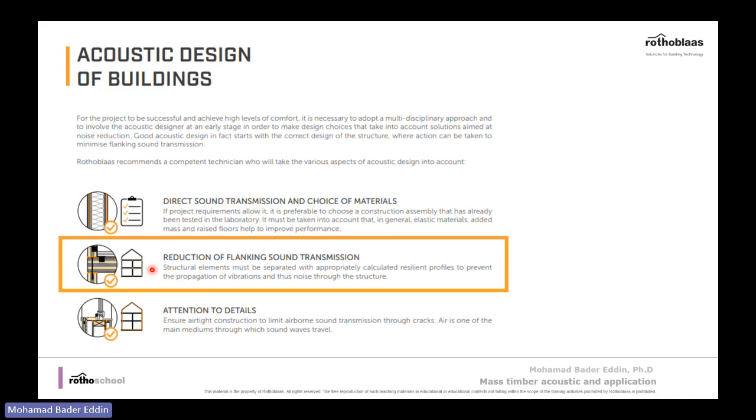So at the beginning, we will start with flanking sound transmission. Here we can see one of our interesting products, the Xylofon elastic interlayer. We have used it in different projects, as we can see here in CLT projects, mainly wood structures or frame structures, in the US, in France, in Vancouver, Canada, and elsewhere.

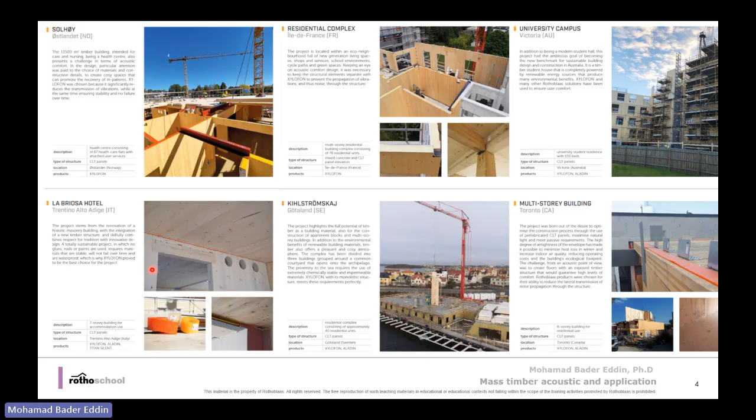So we will start with a bit of an intro about what's the definition of flanking transmission, and we will introduce our solutions and how to calculate your product.

I'll start with a question: are laboratory results and on-site results identical? The simple answer is no, because in the laboratory, as you can see here, we have controlled conditions. We always measure the direct sound transmission of the separation, whether it's a wall or floor. In our case, when we represent Dd, that's called direct, so we measure the actual sound insulation performance of the separation.

However, when we go on site, it's not as perfectly controlled as in the laboratory. We can see that, including the direct path, there are different paths, what's called indirect or flanking sound transmission. In simple walls, sound can transmit from wall to wall, FF, when we say FF, like flanking, and from the floor or the separating element to the other wall, that's called direct flanking, and of course with floor to wall as well.

We can see this on different sides. For example, if you have a typical wall between two rooms, on each side there are three flanking sounds, and if we have four sides, the number of indirect paths totals 12 transmission paths.

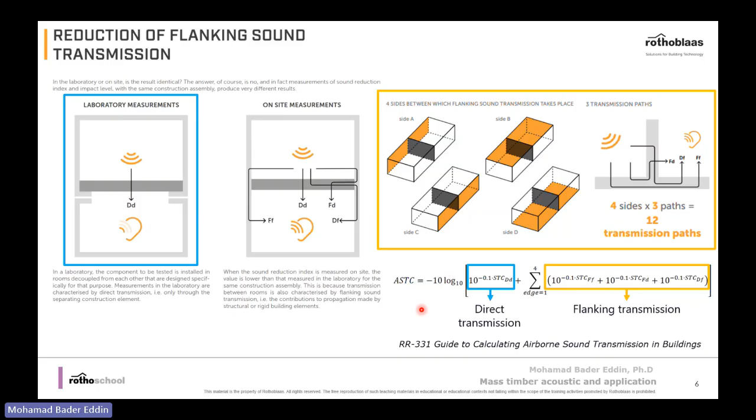If those paths are not properly designed, they can cause a decrease in the sound insulation of our assemblies. Usually we represent the sound insulation performance on site as ASTC, apparent sound transmission class. It's the combination of the direct transmission of the actual assembly or separation, plus the flanking sound for each edge. So each edge, as we said, has about three paths. All of that should be included in order to identify the right sound insulation performance on site.

The sound insulation performance for flanking on edges is highly dependent on what's called KIJ, or vibration reduction index. When this number is high, that means better performance. So the junction at the edge can absorb energy, and we get better sound insulation performance.

Usually this is the case if we didn't put any interlayer, and this is the case when we have an interlayer. We decrease the flanking paths, and only the direct path will be controlled in our case.

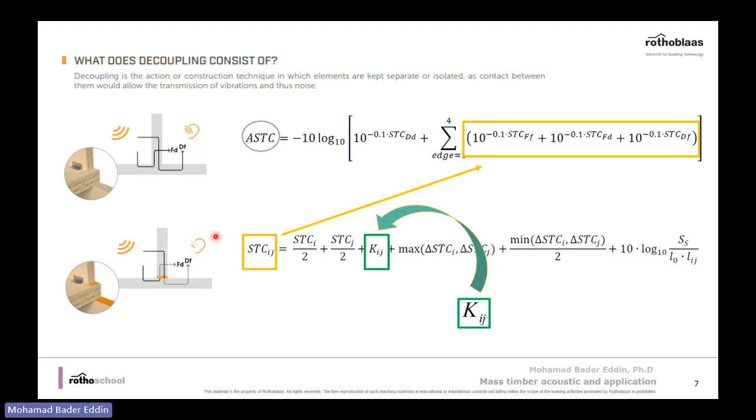Just a small theory about how we calculate KIJ, the flanking vibration reduction index. Usually it's the difference of the mean velocity level differences between two elements. For example, floor and wall: we excite the floor and measure the vibration velocity level differences simultaneously between those elements. It also depends on the equivalent absorption length of the elements.

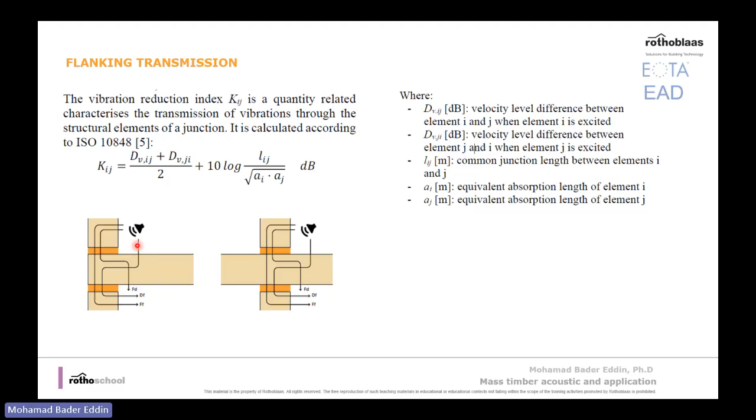So this is how we measure it. It's really important that this is measured and taken into account in order to know the actual performance of your design.

Here we can see that when we have a floor or a separation, it's really important not to control just one edge. It should be controlled by interlayer on all edges, so we can decrease the flanking sound, or indirect sound, which always has a positive impact on the sound insulation.

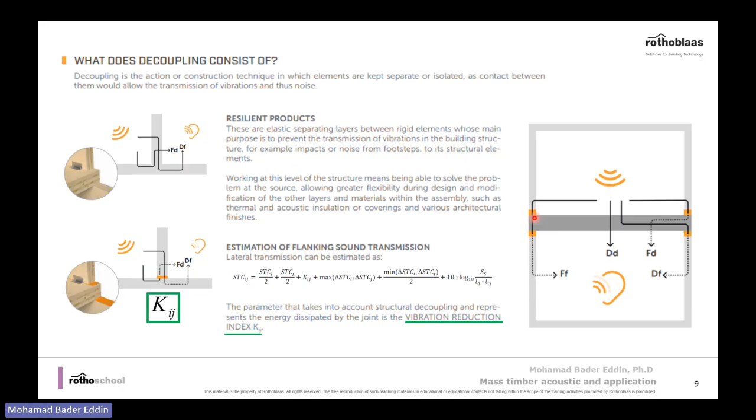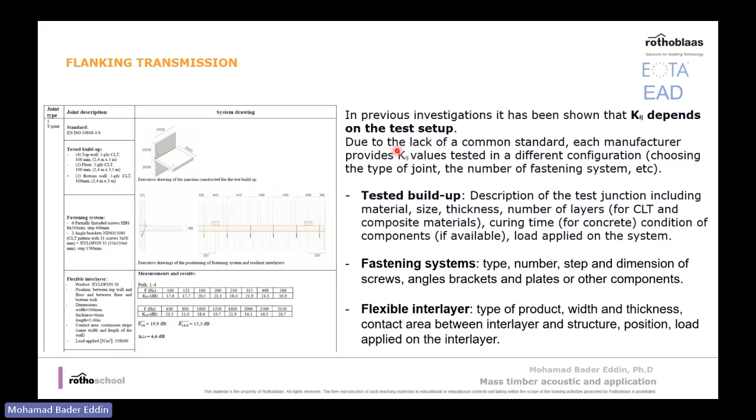As shown in previous investigations, the KIJ or vibration reduction index depends on the test setup. In the market, there is generally a lack of a common standard. There's an indication of how to measure it, but no common standard to identify the performance of elastic interlayers. Each manufacturer provides KIJ values without explaining in detail the test build-up, fastening systems, type of elements, thicknesses, etc. This has a high impact on site.

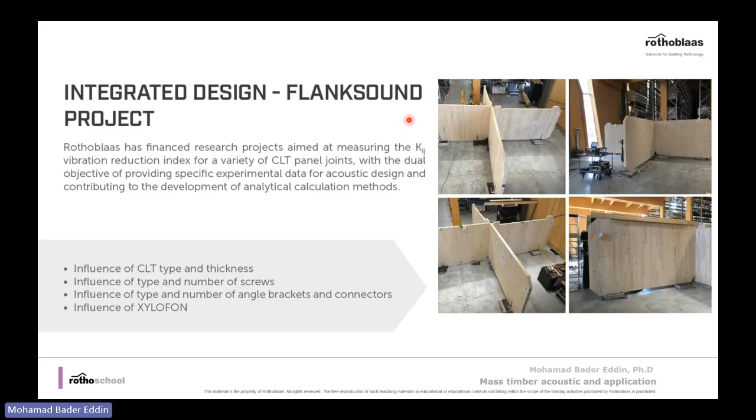For that, Rothoblaas financed a research project aimed at measuring the KIJ, or vibration reduction index, for different CLT panel joints. We identified different CLT thicknesses, and provided details on the number of screws, their diameters, and spacing between them. We also identified the number of brackets, angle brackets, and connectors used to connect those junctions, and the influence of the elastic interlayer. We have different products, and we'll go through how to choose the right one depending on your case.

The objective of the project is addressing that flexible interlayers are not currently covered by a harmonized standard. There's no European, Canadian, or US document that specifies how to provide information for flexible interlayers. The motivation of the project is to analyze and characterize the resilient profiles, in order to have data sheets that provide accurate and transparent results.

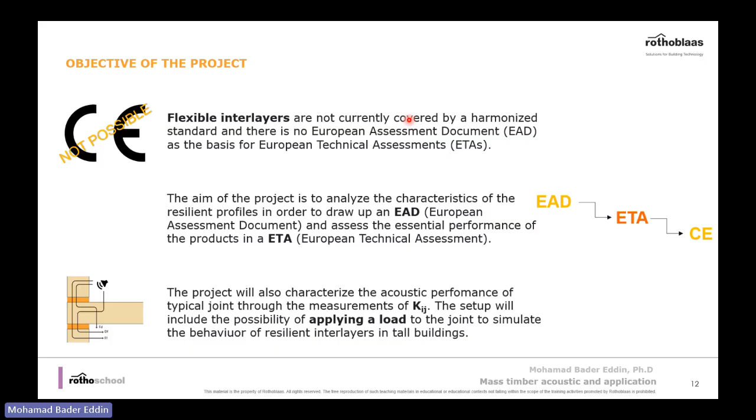In addition, which is really important, in our measurements we applied a load on those resilient profiles in order to simulate the real state, because on site there is dead load, live load, and occupants. This also has an effect on the performance of these resilient channels, which may not match the results written in the data sheet.

Here's one of the examples: we have an X junction. Usually to represent the vibration reduction index, we refer to a number for each side — floor 1, 2, 3, 4. So when we say KIJ 1,2, this is the vibration reduction index in the junction or direction of 1 to 2, floor to wall.

In both junctions of this X junction, we used HBS screws with a 400 millimeter step, with no resilient profile, and a construction sealing. We put it here at the intersection, or on the junction, and we can see up to a 3 or 4 decibel improvement in the sound and vibration reduction index.

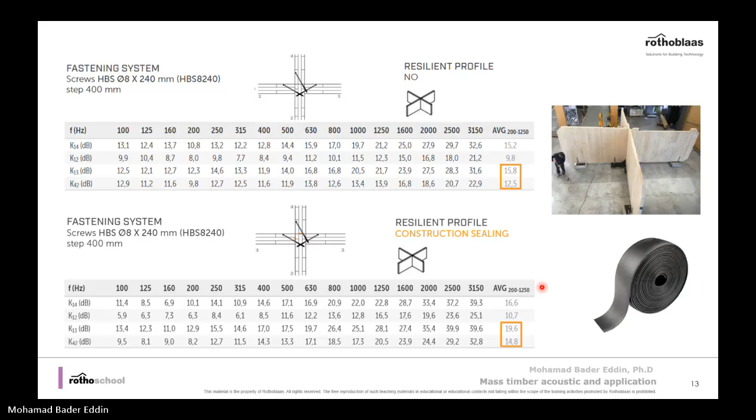Another measurement was done about an L junction. You can see the wall, for example. So there is no resilient channel or resilient profile used, and the only thing used is we increased the step between screws here. We can see that just by increasing those steps, we have almost 2 or 3 decibels better on the vibration reduction index.

This is usually when we increase the steps, it can be reflected another way, that we have a less rigid junction, and the vibration can be dissipated, or the energy could be dissipated through the junction. So we could have improvement, while when we have more rigid, or like more screws, that could also affect it.

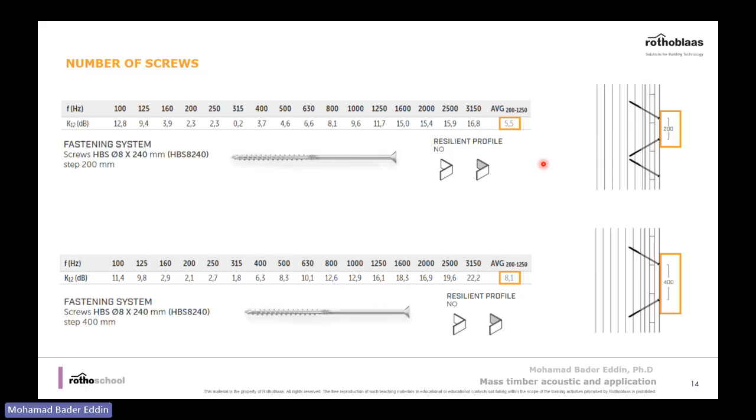So all of that wasn't just some solutions with interlayer. We also included the effect of the screws, the connections with elastic interlayers, and the distance between screws. Another interesting result here: we used the HBS, which is a partially threaded screw, and the VGZ, which is a fully threaded screw. We can see here that we have almost 4 decibel improvement without any resilience, nothing.

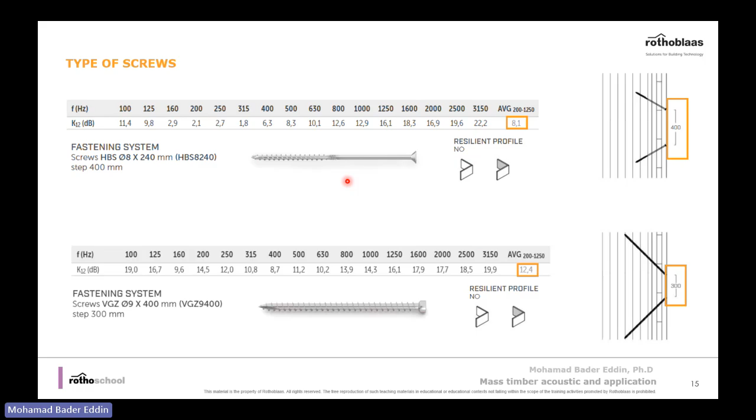We can make a comment here, because when we have partially threaded screws, their job is just to tie up the elements together, while with fully threaded screws, we have connections without necessarily tightening them up as much as partially threaded screws. When you tie them up, they will be close together and tightened, and the vibration can be transferred easily, which of course decreases the sound insulation performance.

You can also refer to our manual for XYLOFON. We have an interesting one, providing many details. For example, here an L junction and a T junction, where we provide the thickness, length and width of each floor and wall, the fastening system, and the type and name of the XYLOFON as well. And we calculate the KIJ.

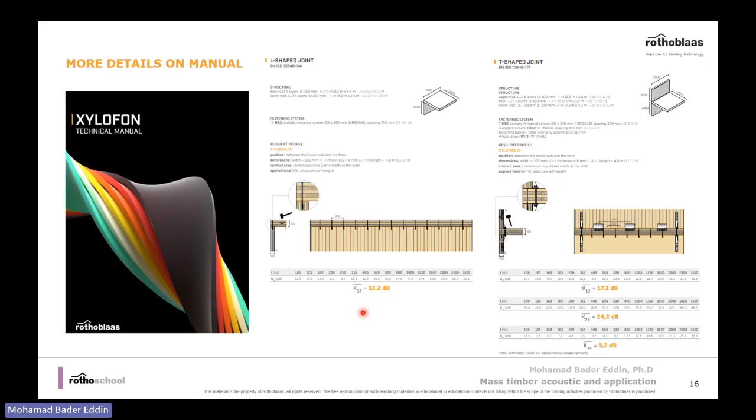Here we can see when we use XYLOFON 35 with fastening, there's an improvement. The KIJ is 13.2, and so on.

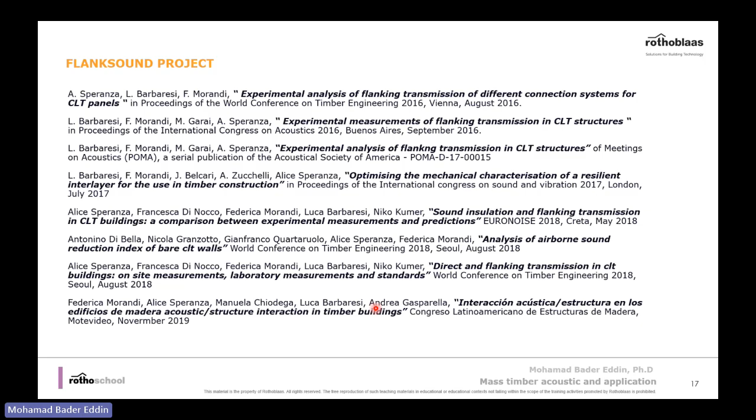For the projects, we also published different articles just to prove our results and to provide how we did all the measurements and the setup. So we can go either to our website or the published articles to find out more details.

Our product is called XYLOFON. We have different types and different lines, and each line depends on the load applied on that junction. For example, with XYLOFON we can reach an improvement of up to 7 decibels for KIJ, and it depends on each structure, each junction, and the details.

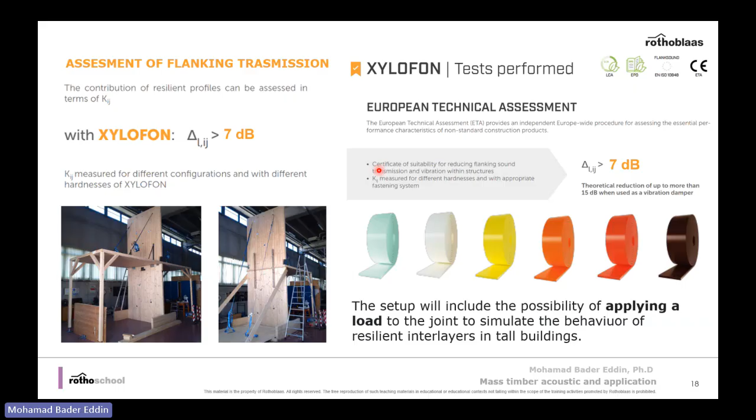Here we can see the mock-up setup. We have an X junction, identified with CLT. We have 2 angle brackets and 6 partially threaded screws, HBS, and we use XYLOFON 35.

We also applied the self weight of the structure, because this is really important, since in reality there will be self weight of the structure, and this is going to affect the results.

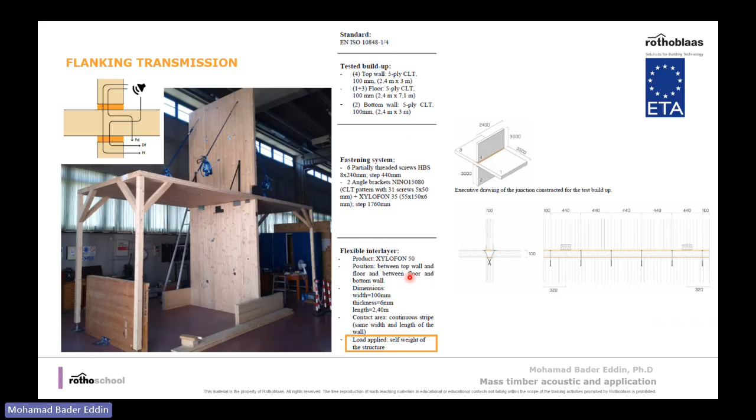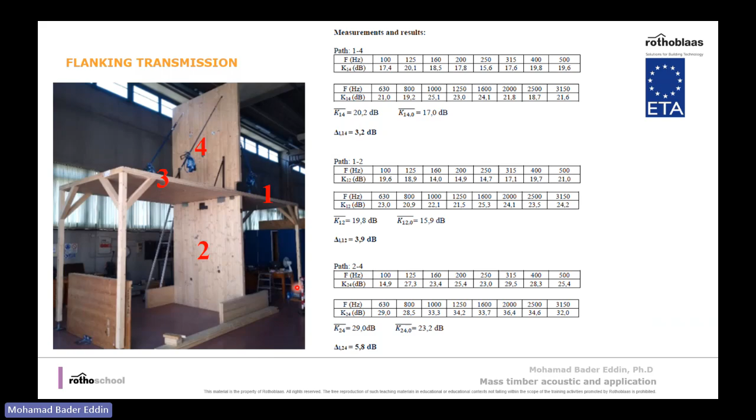Here we can see, as we said, we represent each floor and wall with numbers to identify them. With and without XYLOFON, there is an improvement of 3 decibels for junction 1.4, and as well for 1.2 and 2.4 horizontally, we can have an improvement of up to 6 decibels, 5.8, almost 6 decibels. After that there will be better results, and it depends really on the fastening type, the resilient profile, the loads applied, and all of that.

Here's another example for a T junction. We used XYLOFON between the floor and the wall, as we can see here in the junction details. The same thing: we use 6 partially threaded HBS screws, 2 angle brackets, and XYLOFON 35, and we applied a load as well.

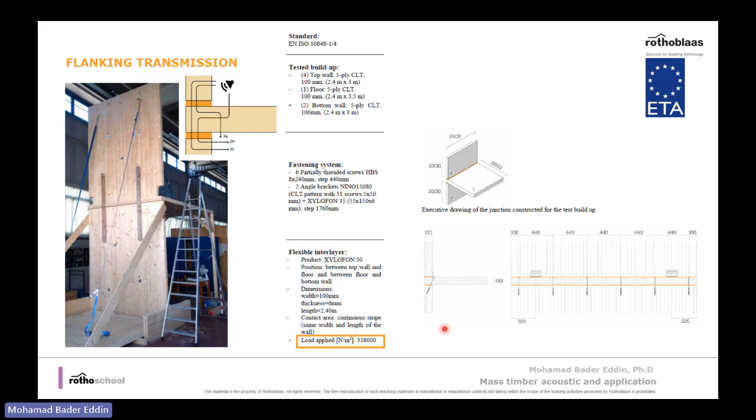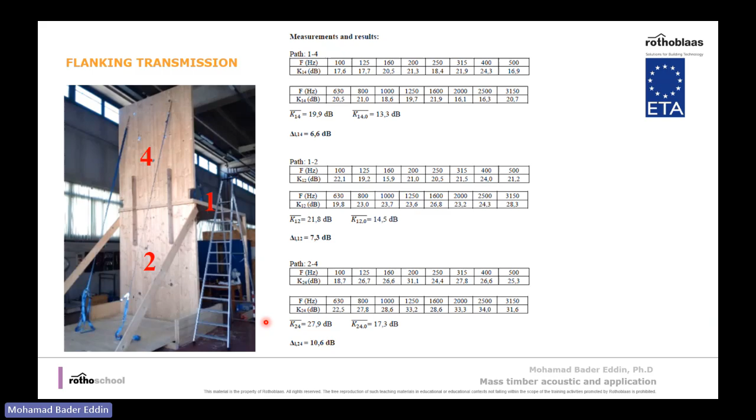We can see here for junction 2.4, for example, when we have XYLOFON in between, there was an improvement of up to 10 decibels, which is high. Achieving those results means you can be sure you minimize the flanking transmission, and you can know that your assemblies, or your traditional assemblies, can be performed without many differences on the data sheet or the sound insulation performance.

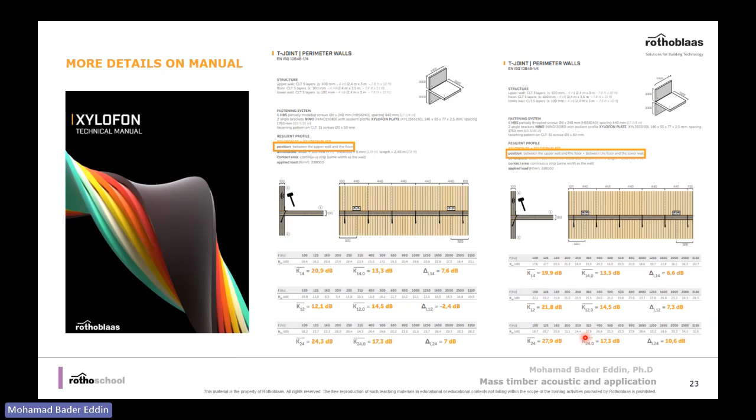And again, in the manual as well, we identify different types and different cases. We have cases with an interlayer just for the upper part, and with an interlayer for both upper and lower parts, and we have all the results for different cases. In some cases we have really high differences, like 6, 7, even 10 decibels for junctions.

So here's a part of the study, because it's important to know that many products in the market have been tested to determine only the dynamic elastic modulus and damping factor. As we said, since there is no common standard, each manufacturer follows different procedures without clearly identifying the test setup, how everything was done, and the fastener system.

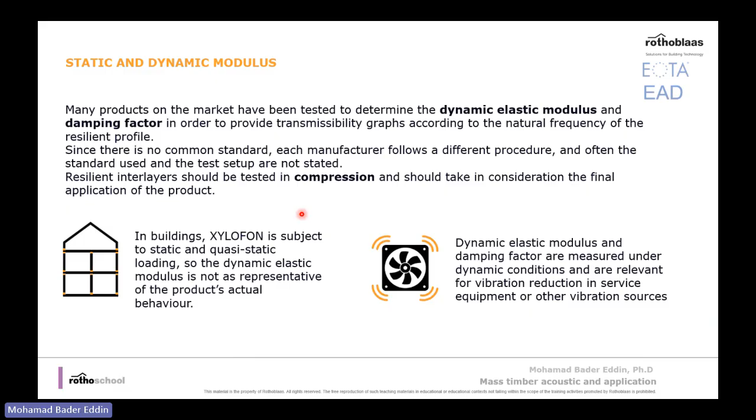So in buildings, the material is subjected to static and quasi-static loading. As we said, the dynamic elastic modulus alone is not representative of the actual behavior, so it's also important to test the compression of the elastic interlayer.

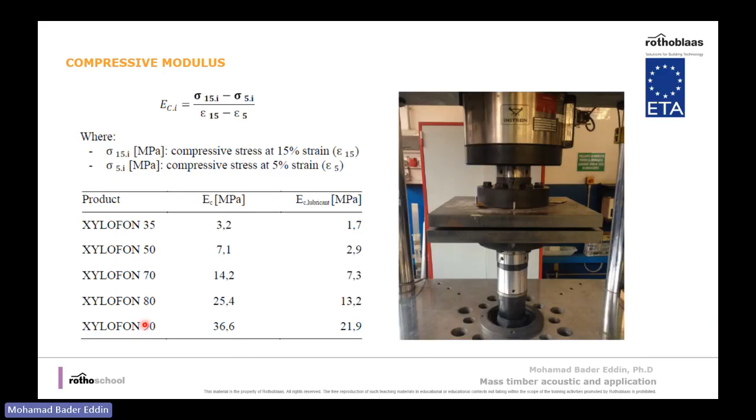So here's the compressive modulus. In our case, we have different types of the material, and this number indicates that when we have a higher number, we have a higher compressive modulus as well.

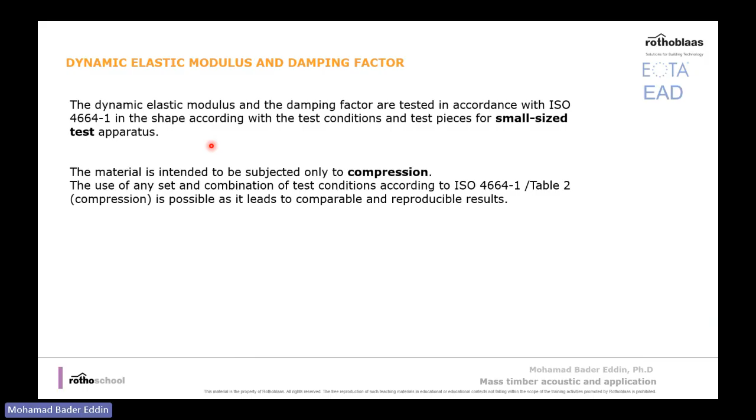And for the dynamic elastic modulus, we also carried out a test according to ISO 4664, part 1, and we followed the test conditions for a small size test. Also, the material is intended to be subjected only to compression, which we took into account.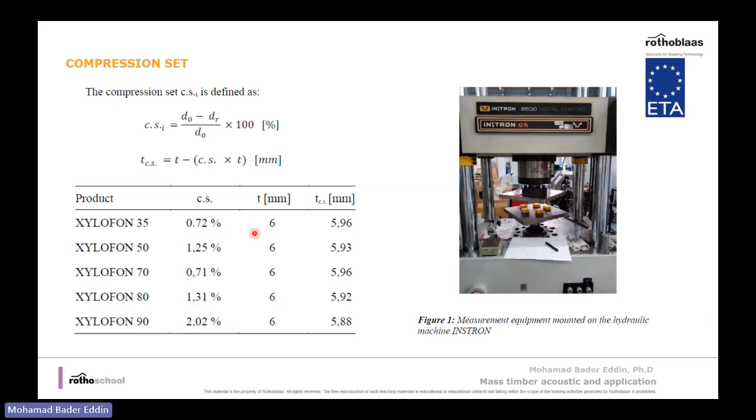So it's really important, because from a static point of view, it's important to provide the compressive stress as a function of the strain, because that also helps limit the maximum deformation and possible structural failure.

We also need to take into account the friction, because that could be one reason that could cause different results in the measurements.

So here we can see it depends on each floor and each load. Here we can see that when we don't have much load, we use the type 35 product, while on the first floor, where we have all the load from the higher stories, we use the type 90, which is more rigid.

So the point is, we don't need to use a product that isn't rigid enough or doesn't have sufficient compressive strength, so it doesn't get smashed. When it's really compressed and has a higher load than recommended, we'll end up with a rigid connection, and the isolator will not help in reducing flanking sound transmission.

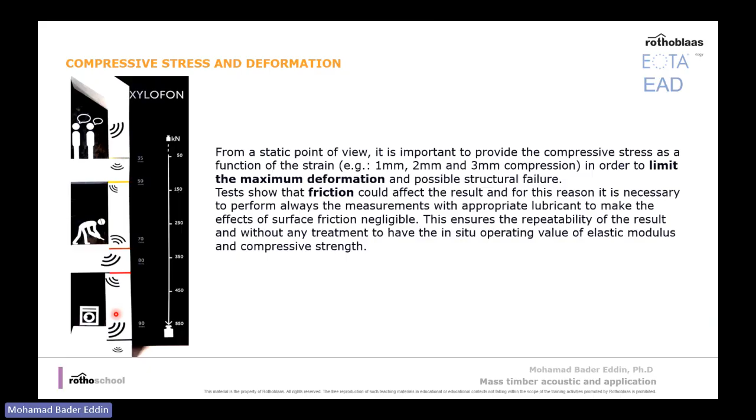So it's really important to use the right product with the appropriate load, in order to get the results indicated in the manual. Here's the compressive strength and deformation for 1, 2, and 3 millimeters for each product we have.

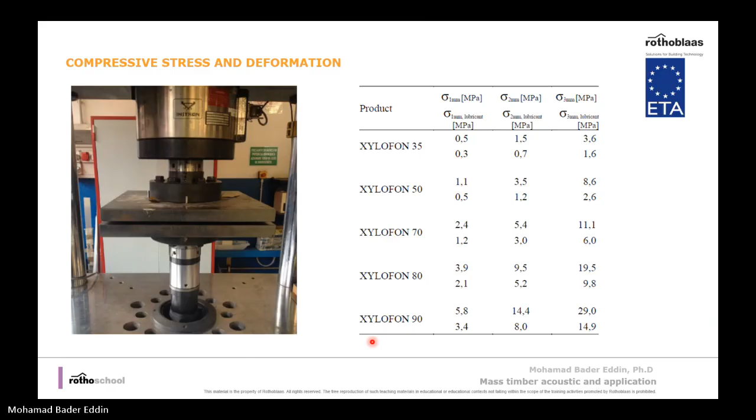Here's what we said - it's necessary to focus on the operating conditions, because the goal is not only the ultimate limit state, since the goal is insulating the building from noise during normal operating conditions, not during design. Because in real life there will be a dead load, the building will be occupied, and it will also have additional load.

So usually this formula depends on each regulation for each country. Usually we have coefficients for dead load, and we have coefficients also - you have to include the live load as well, just to know the appropriate values.

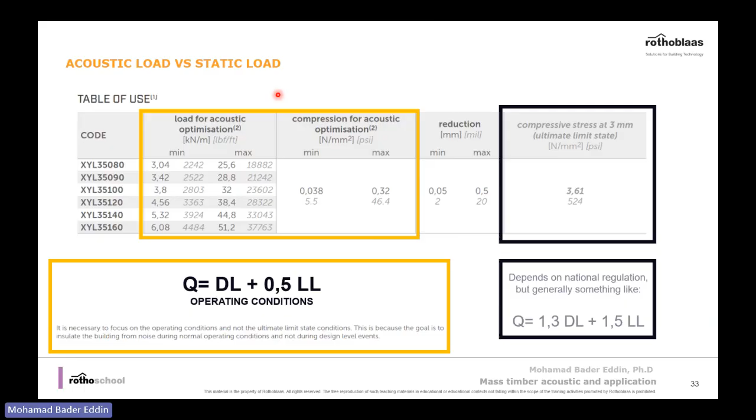And then in our manual, you can see the acoustic loads for each product. In our case, you have to calculate the load transferred from the wall to the floor or the junction. This load should be calculated in Newtons per square millimeter, and based on this, you can choose which product is appropriate for you.

Here's some tests for the type 35 product. As we said, we have different types available.

So we have here a T junction when we use XYLOFON upper part and lower part of the floor, and just when we have XYLOFON and upper part, and for X junction as well when we use it in upper and lower part. We can see there is always an improvement in sound and vibration reduction index, up to 7 decibels.

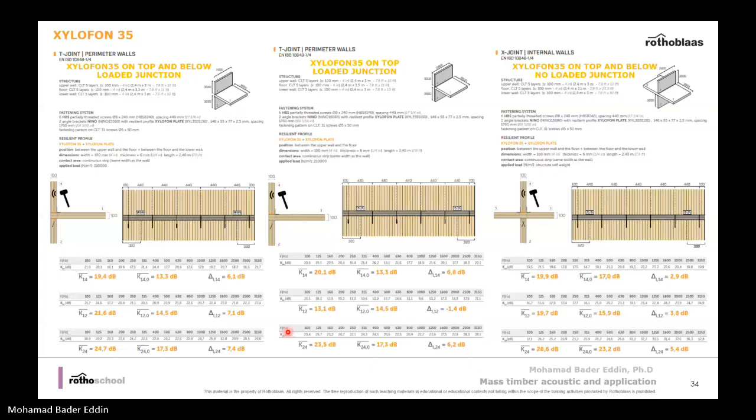So you can refer to our manual to see in which case you need it, and what's the thickness of XYLOFON and the fastening system as well.

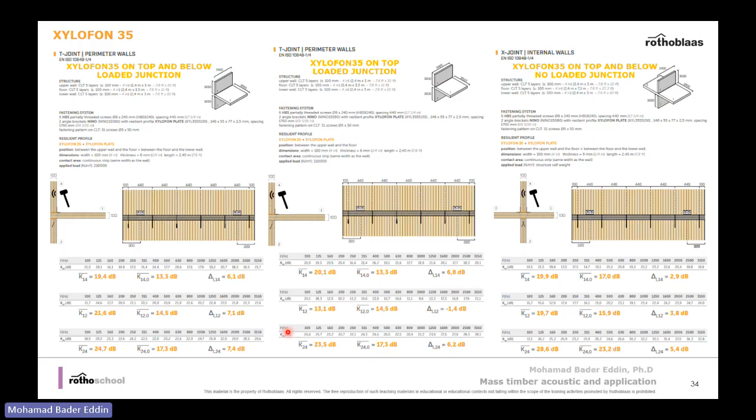Here's another case. We use a T junction with an upper and lower XYLOFON, and as we can see, there is an improvement, sometimes up to 10 decibels.

In this case, we use a CLT 100 thickness and wall as well, and we use XYLOFON 50, and we have all the applied load.

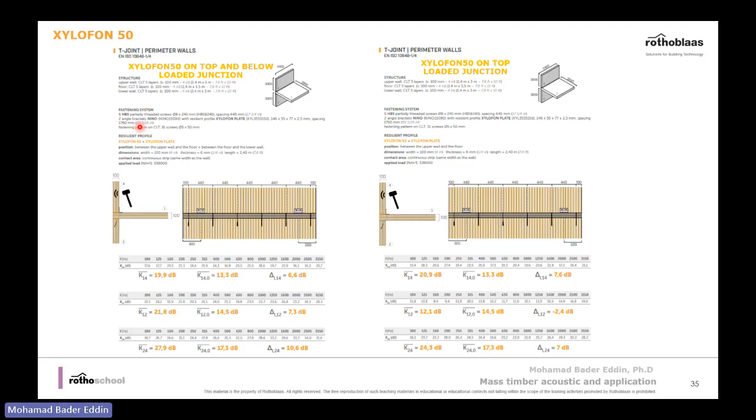In our manual, there is all the information needed to have this: the fastening system, the type of XYLOFON, and all the information on the improvement and sound solution that could be achieved when you apply the elastic interlayer.

So flanking transmission on site, as we know, is a predictive study for the sound insulation of airborne and impact sound in the building. It cannot be determined only by calculation because there are always more factors included on site. So calculations are usually not enough to have the appropriate or right sound insulation performance. In our case, we have a laboratory in Innsbruck, so in Austria, if I'm not mistaken.

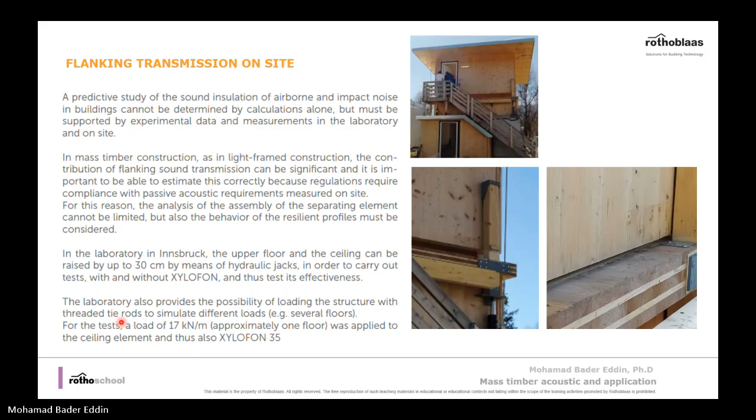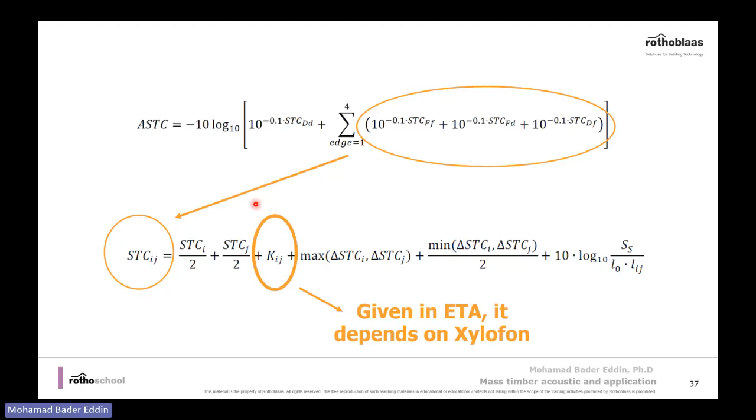In this section, as we said, the apparent sound transmission class for an assembly is determined by the direct sound transmission of an actual separation and with all the flanking sound for all edges, which highly depends on the Kij or vibration reduction index, and depends also on our product XYLOFON.

So for the test, we have XYLOFON up and down, and we can see there is an improvement on total performance, because in this case we didn't just calculate the flanking transmission, we calculated all the performance of an assembly. There was an improvement of 5 decibels, including the direct path and the flanking path, so there was like 5 decibel and 10 decibel improvements.

And here as well, this is for airborne sound. When we included the impact sound, there was an improvement of 7 to 8 decibels. 7 in EURO, and in our Delta IIC impact insulation class, there was an improvement of 8 decibels in each case when we use the XYLOFON.

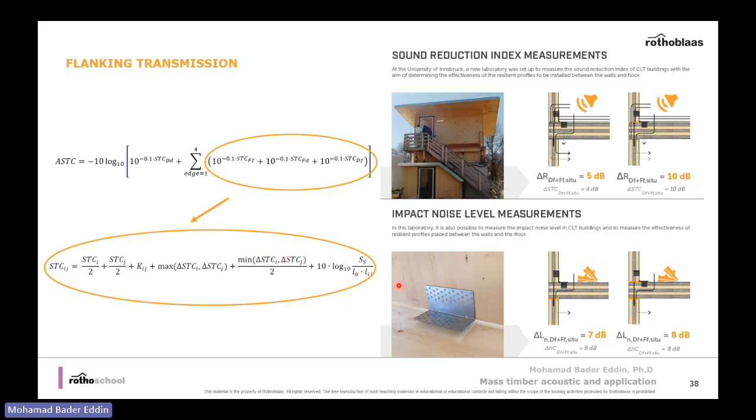Here are some tips on how to use XYLOFON, or some recommendations. Always when we have a junction, when we have a wall with the floor, the junction or the sides should be treated.

In this case, we can see the flanking path transfer from the wall and floor to another room. When we use one XYLOFON, we eliminate just 2 flanking sounds, while there is another flanking sound that can transfer from floor to wall.

And the same is here when we just use it under the floor, there is another flanking from floor, wall to floor. So the right way is to use XYLOFON under and on the upper part of the floor. This way you can eliminate all the flanking sound, and improve the sound insulation performance in your case as well.

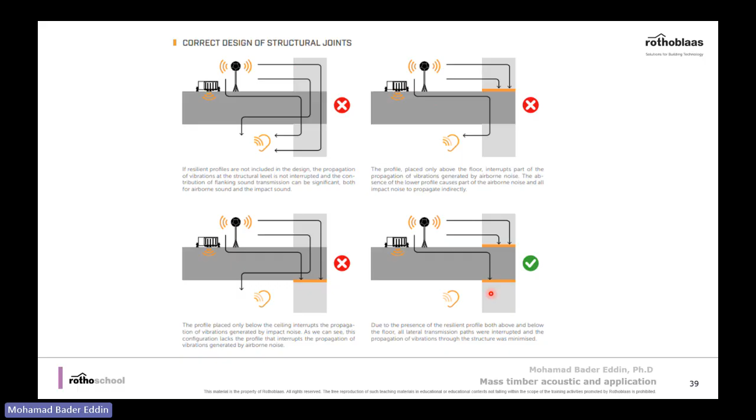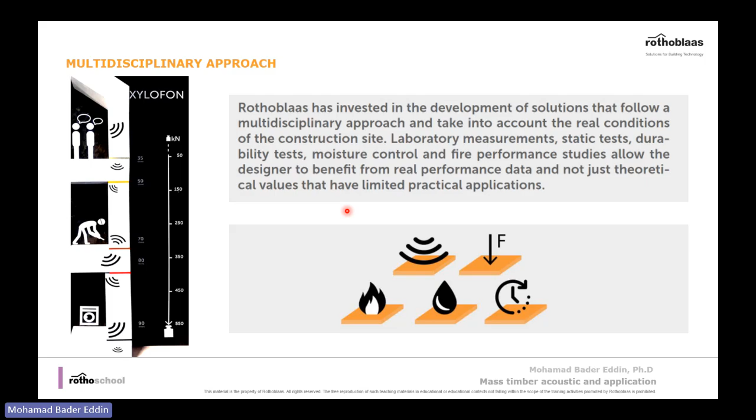And we at Rothoblaas invested in the development of solutions that follow a multidisciplinary approach. So we take into account durability, static test, moisture control, fire performance of the XYLOFON. We don't just provide acoustic performance - all of these were also tested, and we have information about that.

So we performed static performance testing, and the results showed that it has a long-term behavior.

And this is important because, from static review reasons, to avoid deformation further in the structure, because when we have a structure designed, we have a limited tolerance, so we don't need additional deformation because of our products or the elastic interlayer.

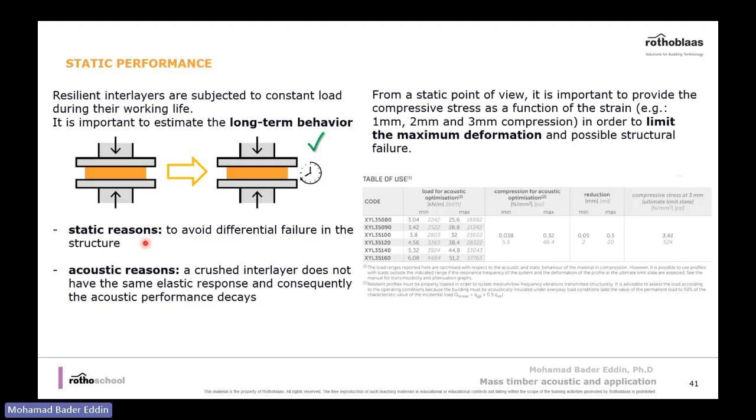And for another thing, it's important for acoustic reasons, because a crushed interlayer does not have the same elastic response, and consequently, the acoustic performance decays.

As well, we have in the manual over 250 tests. We tested not only the sound insulation performance of XYLOFON, but we tested our fastening system, including and without the XYLOFON. Here we tested our screws, for example HBS screws, and we have all the results. So our interlayer is not tested just for sound insulation measurement.

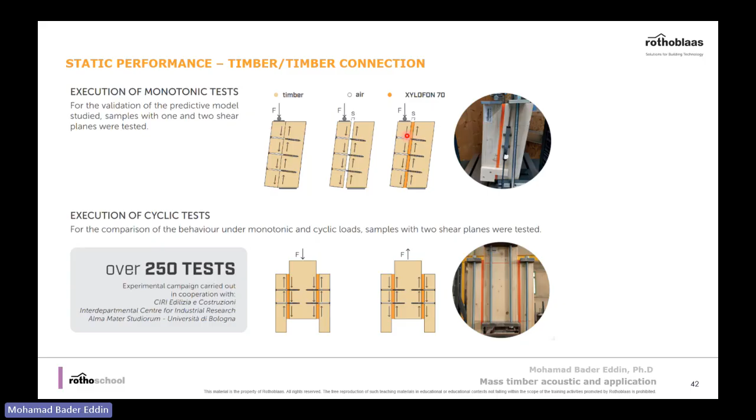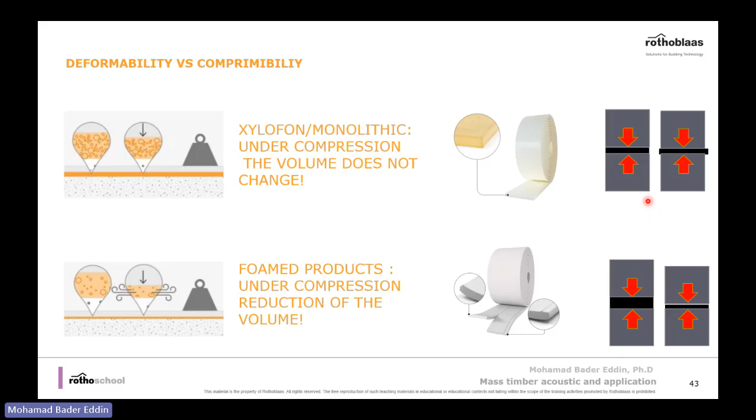So we have as well static performance, and as we can see here, also the deformability versus compressibility. So for the XYLOFON products, under compression, there is no change in the volume, whilst the foam products have a reduction in volume, as we can see here. So it's a stable product, and there is no issue for long-term behavior as well.

For fire resistance, as we know, the awareness of fire design is increasingly important in Canada, US, and all over the world. So at Rothoblaas, we use the characteristic performance for fire resistance.

There was not decay in the performance more than the CLT, and it did not perform in the fire as well, nor react with the fire. And this is really interesting because we have to take care of the fire performance.

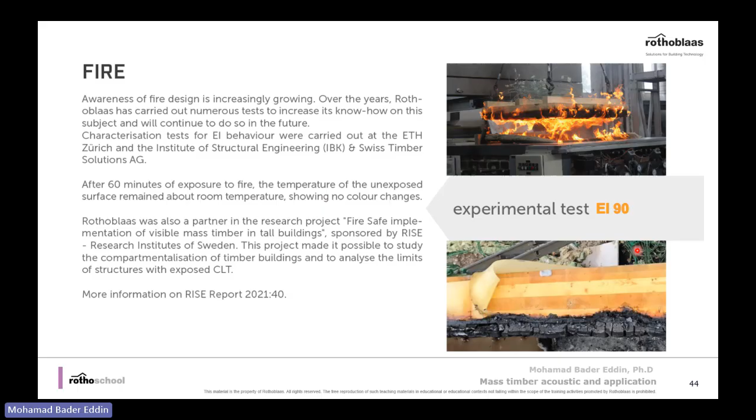So here's the test setup. We have a big opening, and two ventilation openings, as we can see, and in this case we have 6 large openings as well. So we have all these measurements just for fire resistance, to know how it performs.

And it wasn't just the Xylofon - we have different types of fastening as well with our products. So all of that, here we can see connecting floor and connecting floor to wall with Xylofon and a fastening system.

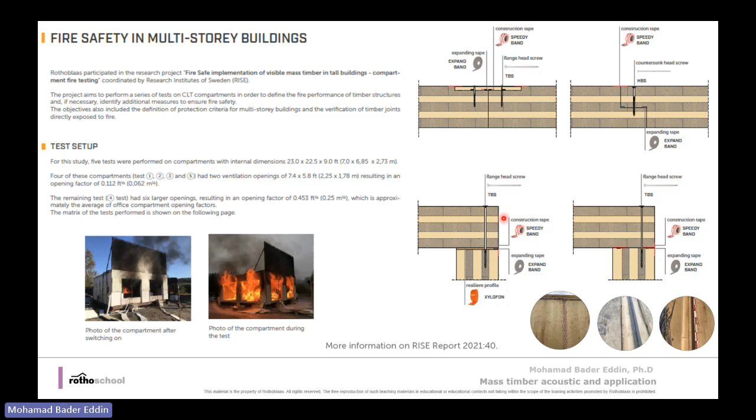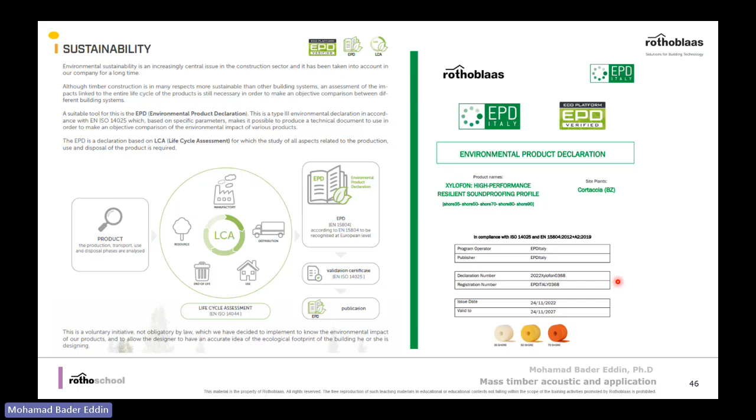For sustainability, we carried out an environmental product declaration, including a life cycle assessment, to study all aspects related to the production. It's important to know that this is voluntary in every step - there is no obligation by the law, but we decided to implement it just to know the environmental impact of our products, and to allow the designer to have an idea of the ecological footprint of the products.

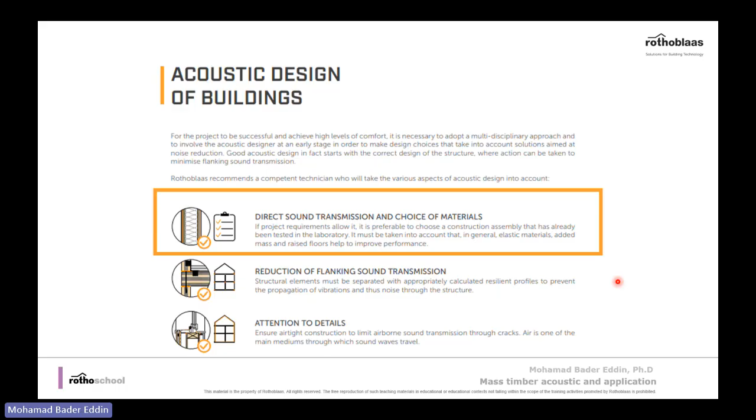Now we will talk about the second part of the presentation, which is about direct transmission on timber elements. As we said, in the first part we talked about flanking transmission and how we use the Xylofon, and we saw the different types of Xylofon and what tests are performed. Today, the second part will be about direct sound transmission. We'll present different assemblies with different solutions using Rothoblaas products, and we'll see the sound insulation performance.

So here we can see for a wall, we have a CLT. Using a silent wall, or silent underfloor just on the joist, on top of the joist, we can have an improvement of 13 point delta STC. Here, for example, another facade, a CLT facade - we just use a Gips Band just on the outer joints. So there was an improvement as well. So we provide different assemblies with their sound insulation performance.

Another product here as well for framed walls without supporting wall. We just used an additional layer of silent wall, so there was a 6 point improvement. And here's another solution as well.

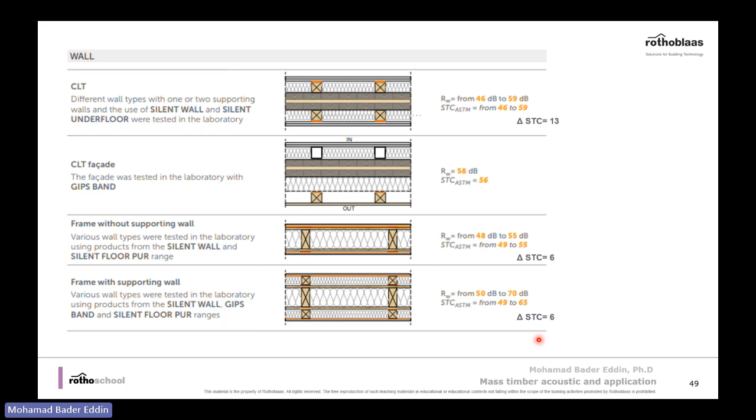If you want to have this, we just added silent wall and Gips Band. The silent wall was in the outer layer after the gypsum board, and the Gips Band was on the outer or inner joints. So we have an improvement of 6 points, and they're really easy to use, can be straightforward to apply. The products can be as well.

So for upgrading or improving the sound insulation for existing products, for existing assembly, here we can see we have a wall that didn't have sufficient sound insulation performance. So we're just adding silent wall bytum. We have an improvement of 7 decibels, and with double layer we could reach 9 decibels.

Another solution could be implementing the Silent Floor if there is a wall directly on the wall. So we can have it, with a gypsum board just to cover it, and we can have up to 6 decibel with one layer, or up to 10 points with double layer. Just to note, in the ASTM, the STC is represented by points, not decibels, but it's roughly the same as RW and STC in most cases.

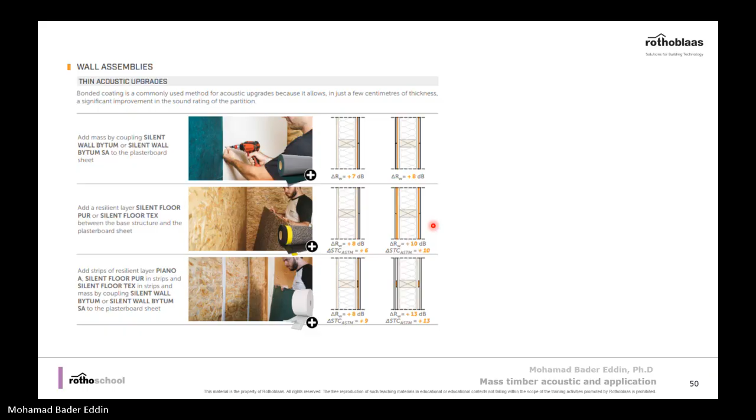And here we can see another solution. We just add piano - it's like a strip here, between after the studs, and we can have up to 9 or 13 decibel improvement, which is really interesting. You don't need much - you can upload or upgrade your wall to have a better sound insulation performance.

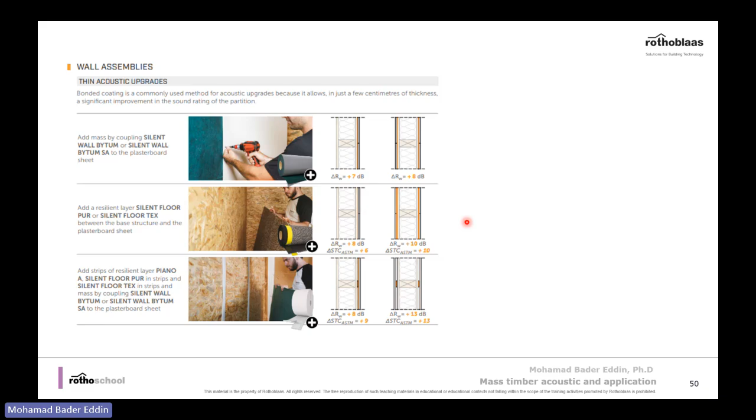Another thing that's really important: when we have a partition, the sound proofing or sound insulation of a partition is strongly influenced by the performance of the weakest elements. In the case of facades, for example, it could be a window or a door. So it's really important to use an appropriate sealing for that, which should be wind tight, thermal and acoustics insulation level, and air tight as well.

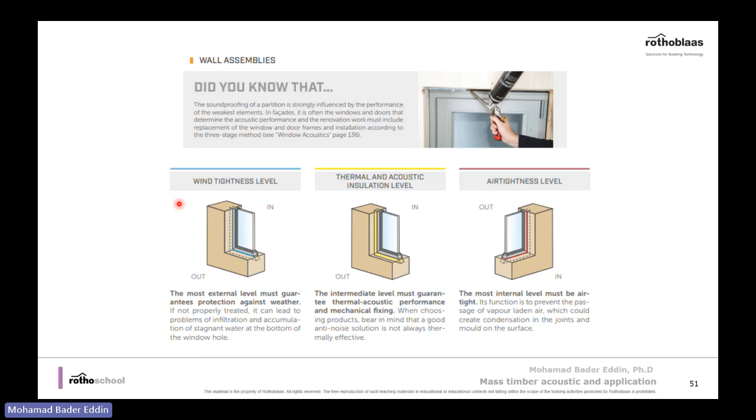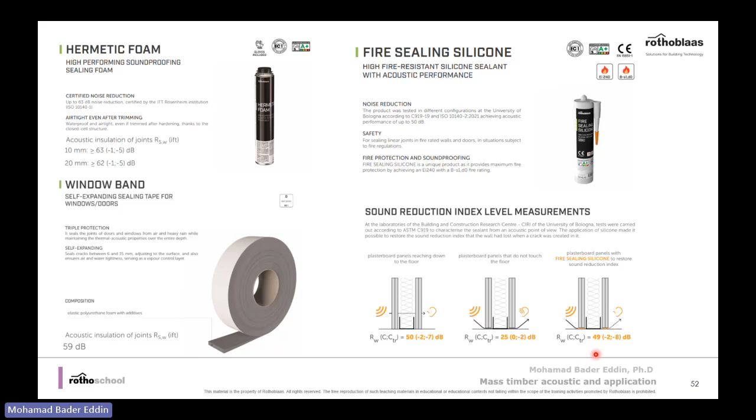So here we can see that if you have a wall with some opening, like at the end it's not continuous. So when you add a fire sealing silicone, you can improve it from 25 to 49. That's impressive and really interesting, because in acoustics, small cracks or small openings could have a really negative effect on the sound insulation performance. So it's really important to pay attention to all the details - it's not just about adding mass to improve the sound insulation, but paying attention to the details.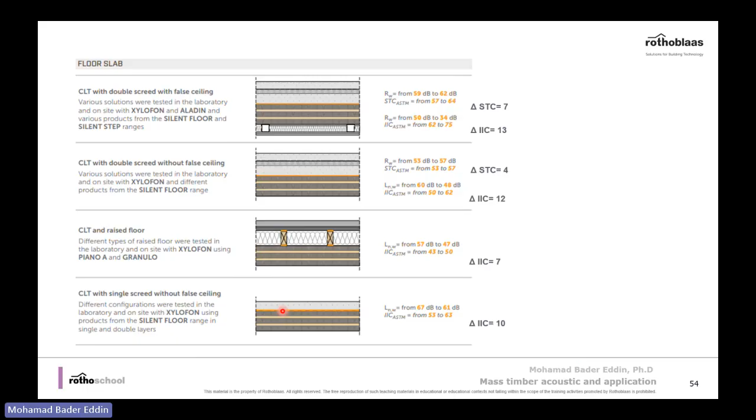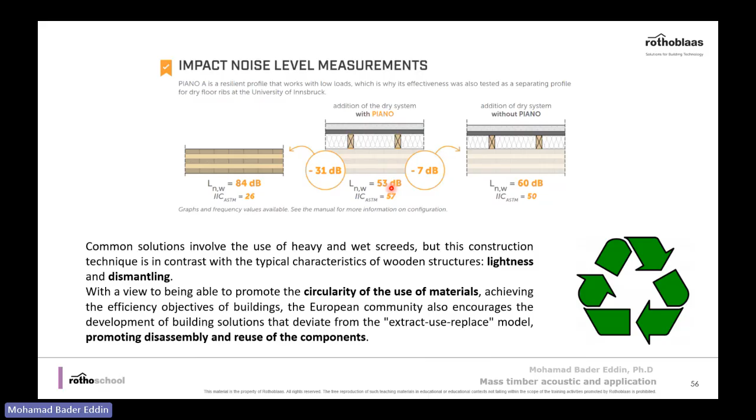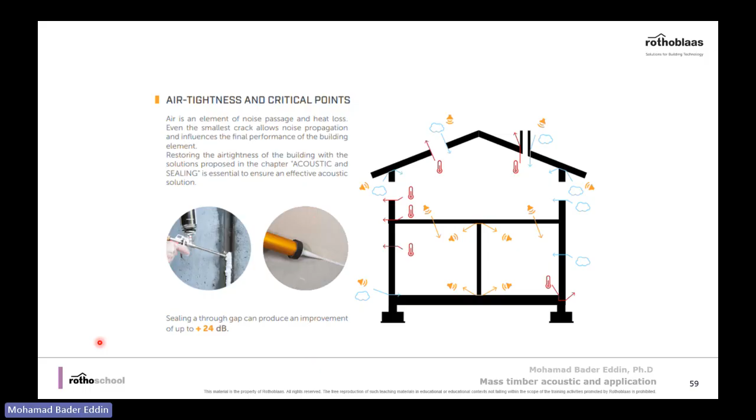The last chapter of this webinar is airtightness and the critical points. As we know, air is an element of noise passage and heat loss, so it's really important to take care of openings and cracks. Sealing through a gap can produce an improvement of up to 24 decibels. Here are some solutions we provide.

In the case of mechanical, electrical, or plumbing penetrations, we can use a silent pure or SILENT WALL BYTUM in the wall, or an electrical enclosure. Here's another example: there's hermetic foam for mechanical, electrical, and plumbing penetrations. You can use hermetic foam to improve the sound insulation performance and decrease the passage of sound and noise.

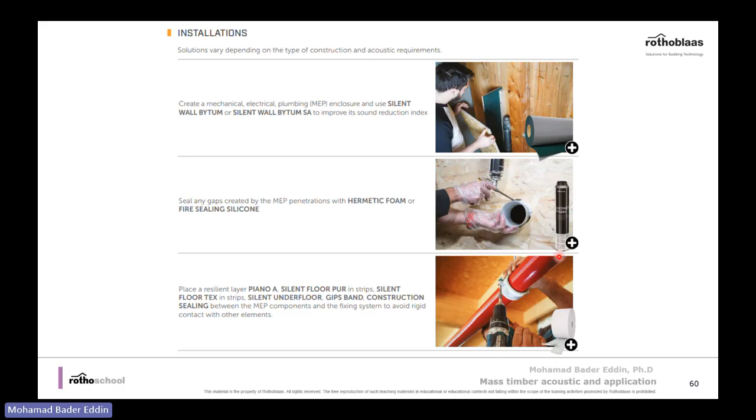Here's another example: you can use PIANO A, SILENT FLOOR PUR, or SILENT FLOOR TEX. There are different products that can be used to improve sound insulation and reduce transmitted noise.

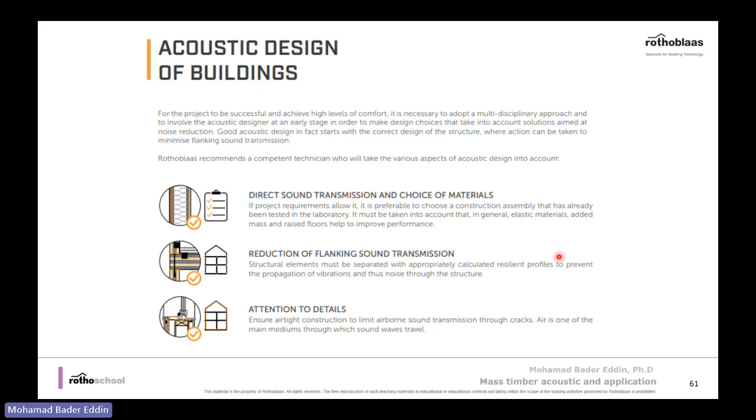This is all the points we discussed today. Thank you for your attention, and please feel free to ask questions.